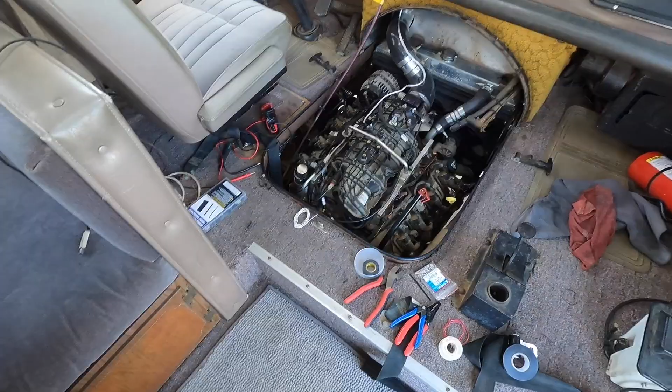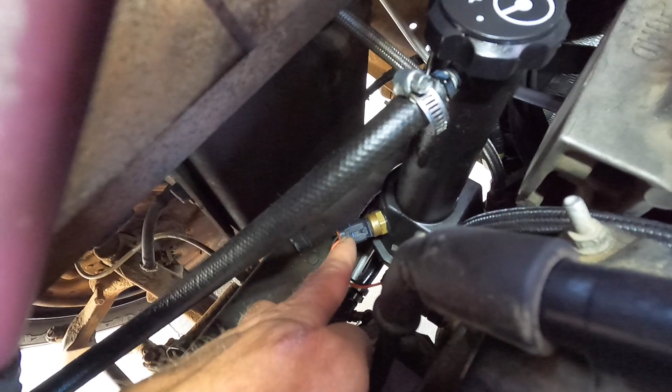There is our temperature sender. It's actually just a sensor, a 2-wire GM coolant temp sensor is all that is. I drilled and tapped this, and I thought the housing down low would be thicker. It is not, it is very thin plastic, but it's pretty rigid. So I drilled it, tapped it, and this is a coarse thread unit.

So I ended up using some silicone, and then I cut the crush washer off, and I put a fuel injector Viton O-ring on the end of it, because if you've ever pulled these out of the engine, there's a gap where the threads stop and then the crush washer is. I wanted to take that up, and I couldn't tighten this willy-nilly because it's barely in some crap plastic here. So we've got an O-ring, silicone, and I tightened it by hand, did one of those, and let this fully dry.

So this is where we're at. That is submerged in fluid, so the fluid's up into here, where the little stick grabs it. So that's in fluid now.

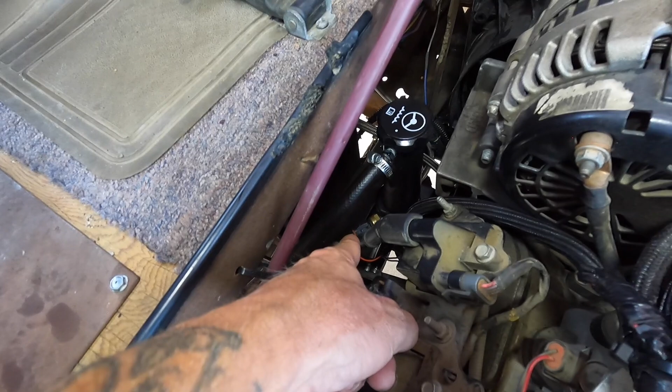As far as wiring goes, if you'll notice, we're on the same jam as where the coolant temperature is, so it kind of worked out. I stole the ground from the coolant, because that's your Holley computer ground, the signal reference wire if you will. And then the orange or red wire is the signal that goes into the computer. So I have that on this guy here that I snuck back in the loom.

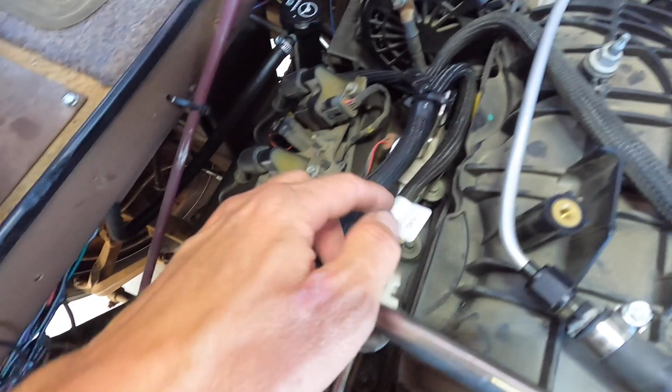And then my pull-up circuit is in here. I pulled the 5 volts off of my fuel pressure sensor, you see it goes in right here, so where everything's spliced out, I opened this up and did my pull-up circuit in here. So for a real quick reference, what a pull-up circuit is: you introduce 5 volts onto the reference side of this.

So going back to the computer, it's 2.2 kΩ resistors on a 5-volt circuit, which gives you the output you need for the 2-wire sensor. It'll make sense if you watch A21 Bravo's video, but essentially that's what I did. So we got it all wired in, it goes to the I/O, and I'll get this lamp out of the way so you can see.

I also got cups of water, boiling, ice, and ambient temperature. And the cool thing is, since it's really close to where the coolant temperature sensor is, I'd plug it in where the coolant temperature goes - that's the standard issue for the Holley. I'd take the temperature through that circuit, then unplug it and plug the new one in, which is the power steering temperature, and see what the offset was, trying to get those to match.

So I did my work, I'll show you the Holley. Let me fire up the laptop - it has a bit of a curve to it at the end. But from the low to the mid, up to a certain point, I think it was like 185, it's basically on point. So it's linear until it gets there, and anything over that, we're probably just going to fire the fans anyway, maybe a little premature.

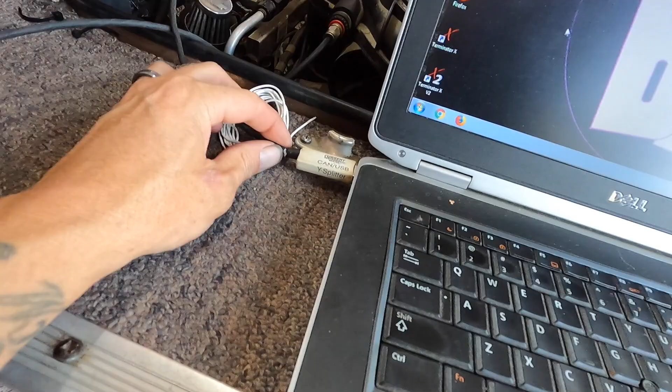Man, this cord's probably seen better days. All right, we got the dinosaur fired up, plugged in. Let's hit the key - hopefully I didn't drain the battery.

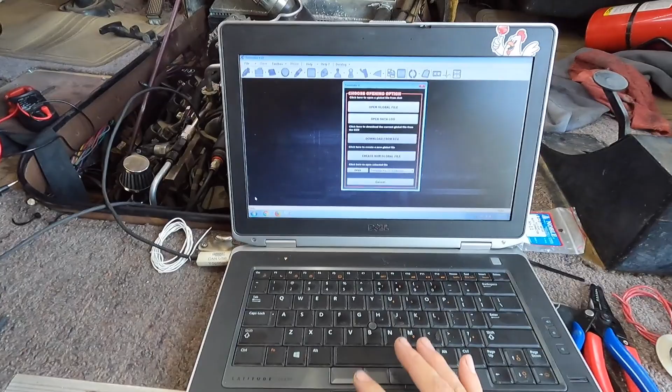Fire up our Holley, open global file. Let's see if we can just pull it straight out of the ECU. Yes, okay, hopefully the glare's not too bad and you guys can kind of see, so that should be good.

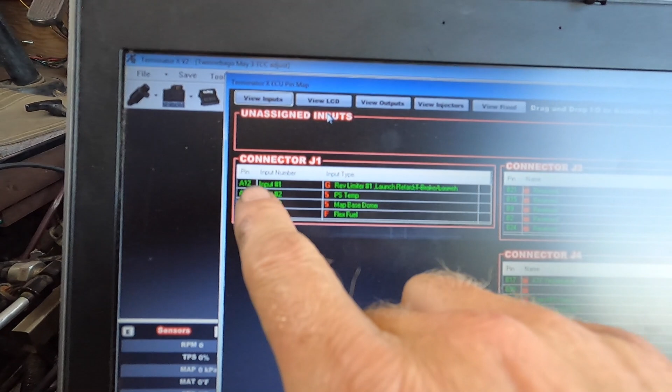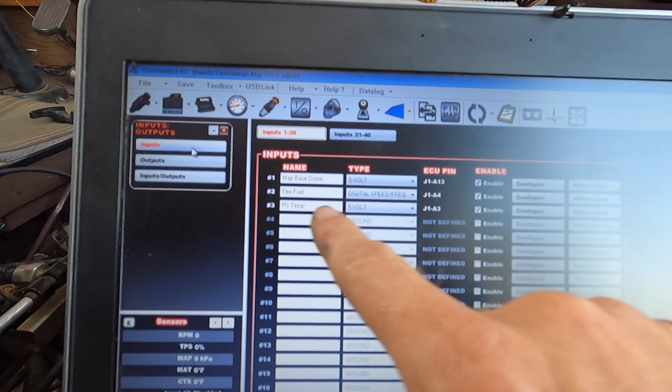So let's go to the pin map - I have it pinned, it's an A3 PS temp, so that is good, that's there. Then we go to our I/O, inputs, PS temp - this is our ECU pin, it's 5 volt. I have it enabled and we can configure it.

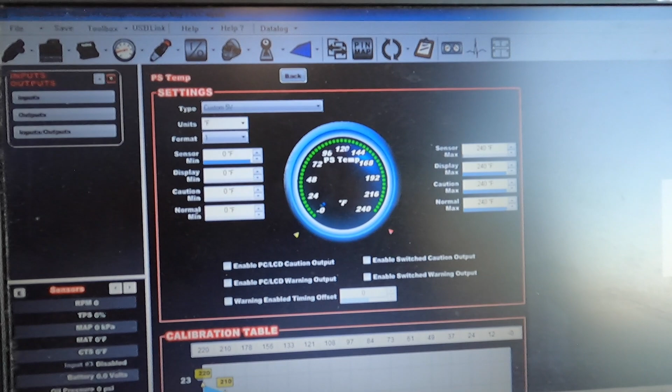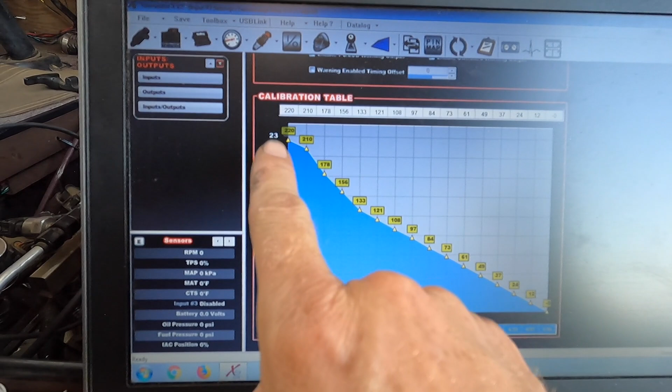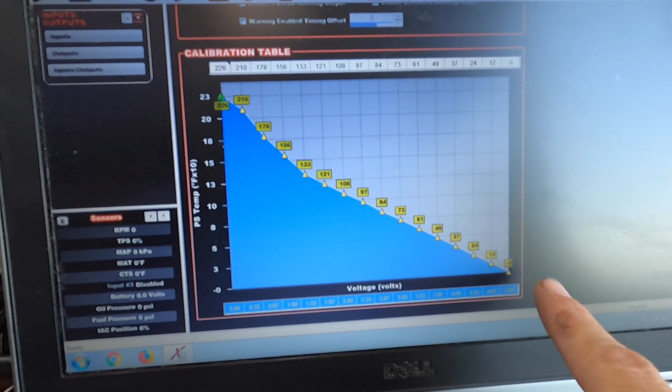So here's what we have - the max I show here was 240, minimum 0. Custom 5 volt, units are Fahrenheit, format is 1. This is our little ski slope deal, and when it gets over here kind of willy-nilly, we could probably just pick this thing up and do one of these with it. But essentially to this point, and this little slope all the way down, we're pretty well in the ballpark for the most part.

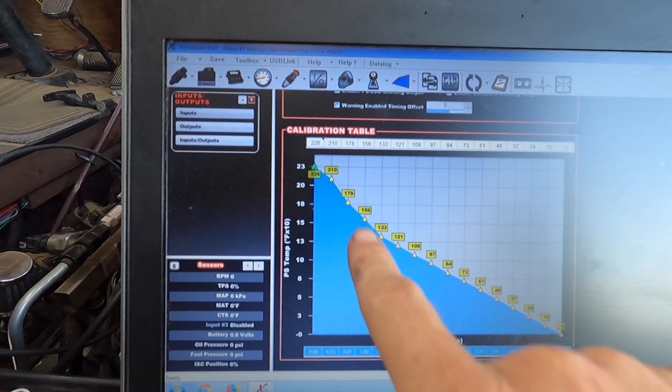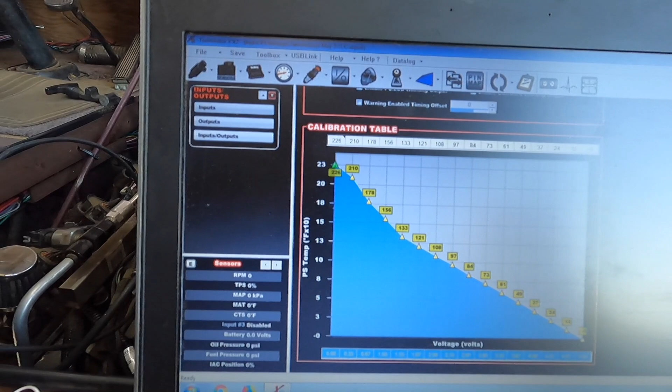So I feel confident in this whole range here. Again, I think power steering fluid starts to boil when it gets up here, and hopefully we're cruising somewhere around, I'd like to be down here, I really don't want to be up there. But I know between here and this range, it's going to be pretty accurate, but I think we're going to fire it off before then.

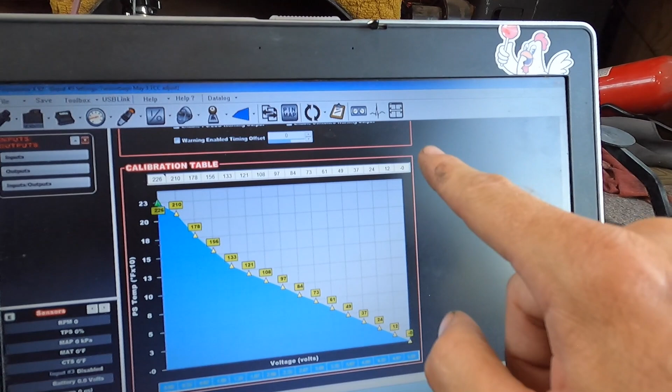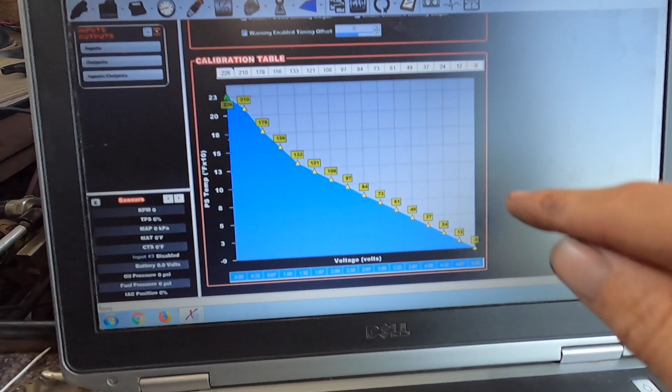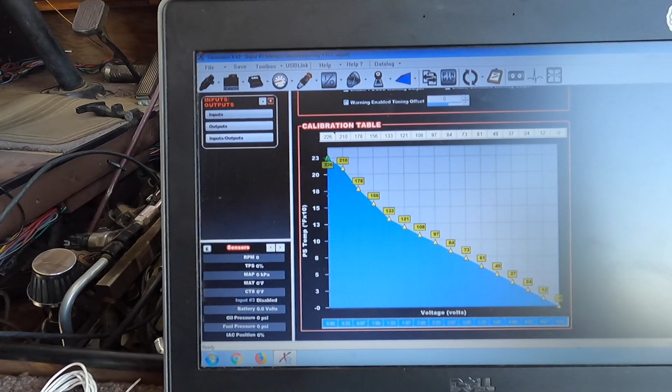So that's the slope, that's what I came up with - 0 to 5 volts, and it's 226 to 0. The reason I did that slope is because when I first punched it in and pulled it down, it kind of ballparked me, and then I just manually moved these as I checked temperatures. Like I said, we did ice water, ambient temperature, and then I boiled stuff, and I think this is around the hottest I could get it. I wish I could have gotten full-on boiling water, but I guess I could boil something in here since it is a motorhome, but I think we'll be good with that. By the time it's 180, we know we're getting warm anyway, I'd imagine.

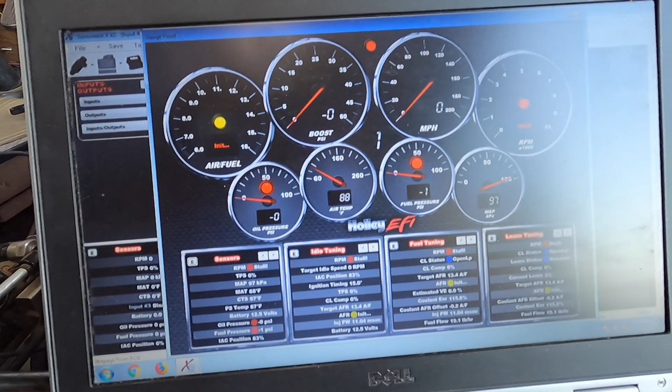So if we go to this guy, turn it on, and go to our gauges - I have it right here. So we got 97 degrees on the coolant temperature sensor, and we got roughly 87 on the power steering.

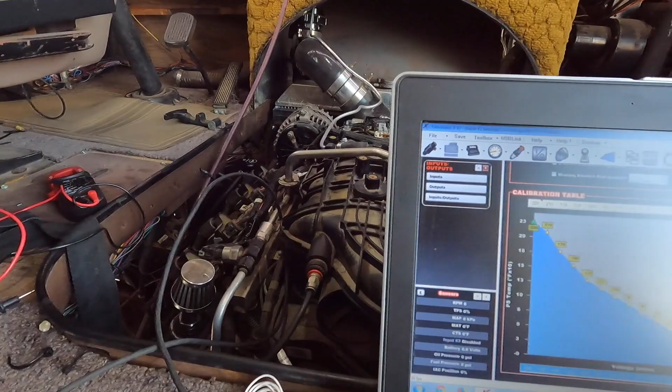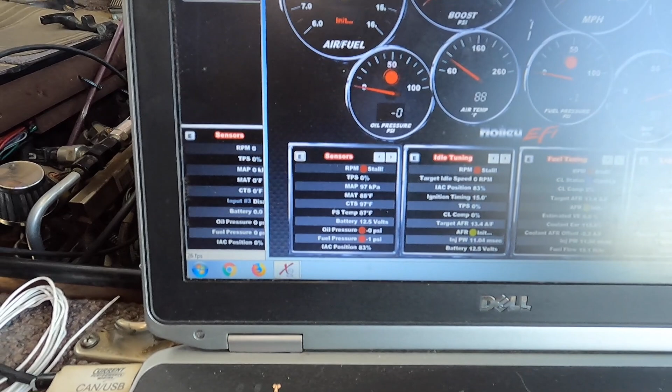So it's a little off from ambient, but I don't know. One's measuring coolant temperature head in the sensor in the head, and then the other one's measuring a separate reservoir. So I'm gonna trust it for the most part. But yeah, I wonder why coolant's already 97 anyway.

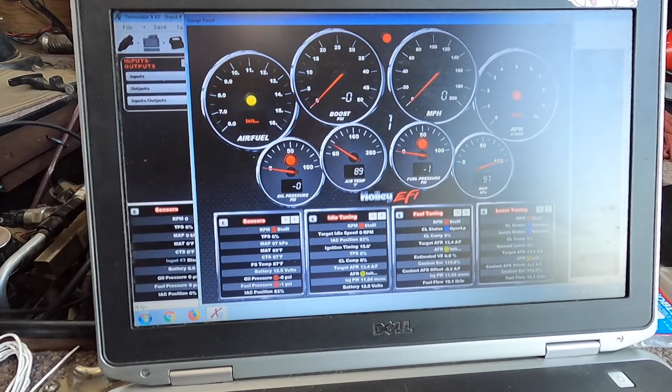So that is that. We could fire this thing up and probably log it and see how they kind of go together. So maybe we could do that, and then we can check for leaks. So let me do this. We'll data log it.

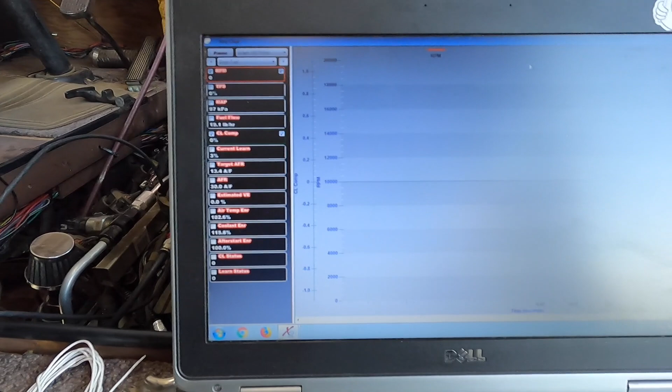Okay, we're running. Let's fire this boy. Sensors, power steering temp 87, and the coolant is 102.

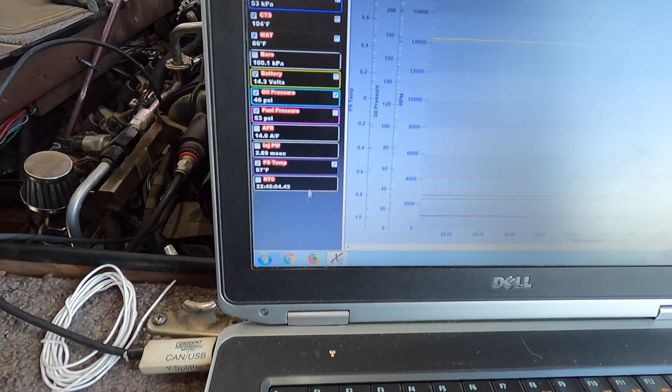So that's it. We'll let it run. We'll log that, let it heat up, and then I can bring you back when we have a data log and stuff gets warm. So let me let this idle a little bit, and then we'll go over the data log and make sure they're kind of cruising together.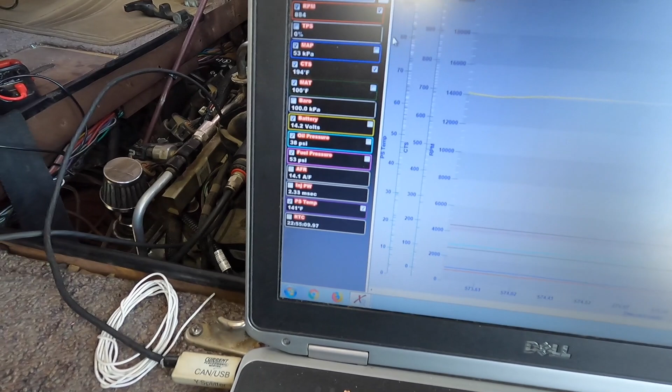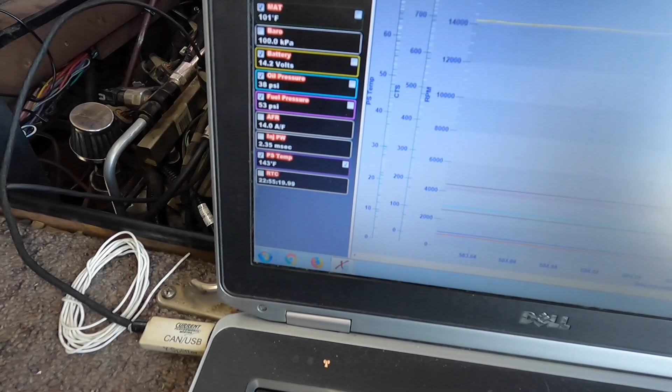And the coolant is doing its thing. So what I'll do is I'll wait a little bit longer. We'll kick the fan on this thing. We'll see if we can make it go down. But I don't feel like 140 is terrible. We'll see what power steering cooling is supposed to be.

Okay, me and the tester are gonna make a run. We're gonna go to Target because it's Mother's Day on Sunday, huh? So we're gonna go pick something special out, drive the Bago over there.

Unfortunately the circuit I added, I can't see it, or I don't know how to look it up on this little 3.5 dash. So I can't really monitor it here, but I have it firing on the Holley, and then it should turn off and on if it gets within the temperature range that we selected. And then I got a temp gun, so when we get to the destination, I can just shoot it with the temp gun and kind of see what the fluid temp is on it, and we'll just do one of those. But I'm gonna know if it's working or not because the brakes will kind of squeal and they'll kind of drag a little bit if it's too hot.

But I think we're gonna be doing good, so we'll head over there, and then we'll bring you guys back to the parking lot. We'll gun some stuff, we'll temp it, and then we'll get something special, and we can't show Mom, so we can't put it on here. And then we're gonna come back home and wrap this thing.

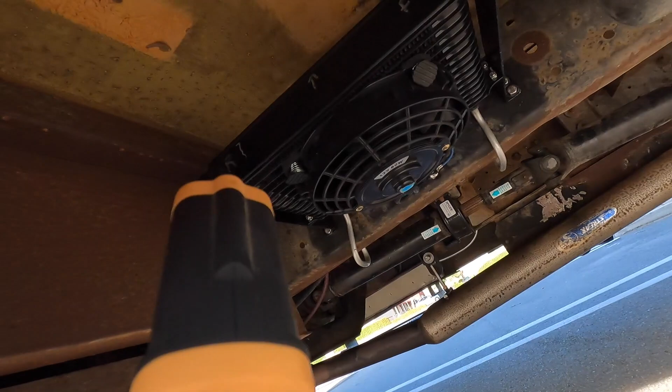Okay, it was getting like high 60s, 165, like 170. So let's see, little fan's on now. No, the fan's not on, so it's not even 170. It says 136, 135, 132. So yeah, that's good after our little drive. We went real nice and slow, so I'm happy with that. Like I said, the fan's not even kicked on, so it's less than 170, so it can't be too bad.

So we're gonna go get top secret stuff, and then we'll get home and wrap this.

All right, we're back. Did we get the good stuff, dude? For Mommy? You think she'll be happy? Yeah. What are you playing with?

He found the temp gun, so now he wants to know the temperature of everything. So we'll run back home. Then when I get back home in my own driveway, I can leave the thing running and kind of look underneath and measure temperatures. But I feel pretty good. We haven't gone very far, but today is pretty warm. It's like 87 degrees today.

So we'll sneak back over there, and then this thing is ready to continue rigorous testing. The weekend's coming up, so it should be nice and hot this weekend. So we need to kind of scout some locations. I have some footage I need to get with the Bago, so maybe we can cruise this thing around, scout locations, and just put it through its paces this weekend.

And then yeah, so we'll wrap this in. We go home. We'll see how she does on the way home. It's not very far, but yeah, test is a test, right? Pulled in.

Let's see if this guy's on. Nope, not even on, so that's good. That means it's staying pretty cool. This guy, however, you can hear this fan zinging because there's only one fan working. So that right fan is just not too excited, which is not good, but it is what it is.